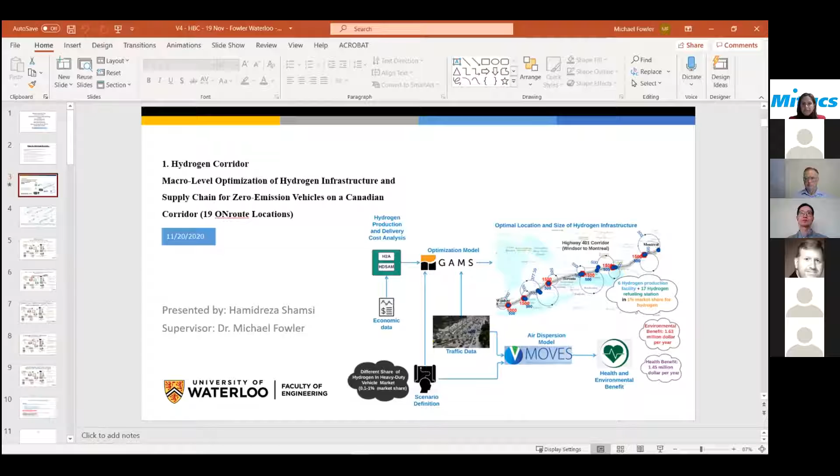So if I look at the scenarios, hopefully you can see 5 scenarios now. Yes, we do. Okay.

So the scenarios start at 0.1% of the total number of vehicles, going up to, let's say, just 1% of the Class 8 vehicles. I'll just say class vehicles, although I'm including Class 7, 8, 9, and 10 vehicles, which are all slightly bigger or smaller vehicles. But Class 8 is the most common one that we have.

If we look at up to about 1% share, we've looked at those scenarios. We've said that about 1% of the hydrogen, or about 200 Class 8 vehicles of the total 20,000 truck trips that I'm referring to—so I'm not really counting the number of trucks, I'm counting the number of trips.

I say you have about 500 kilometers per day. So I can envision maybe 200 vehicle trips needing hydrogen along the corridor. That's where I see the first change we can have.

The first thing we can say is if you look at scenario number 5 here, 1%, then we will need 6 en route locations, and the other locations can be served by moving trucks with hydrogen to them, to refuel at all the other en route stations. So that's what's working around for us.

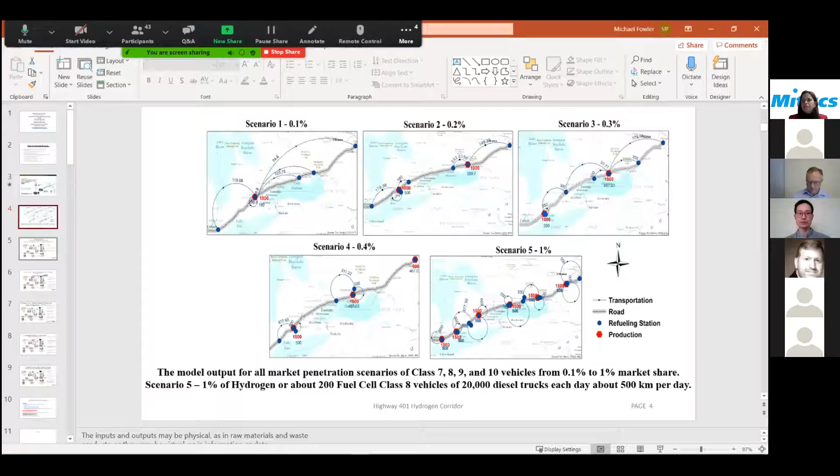So what I'm really looking at is the idea of what I call the hydrogen economy, one of the power-to-gas energy concepts that you'd have. All the common pathways to power-to-gas involve hydrogen—you go into the grid and into the electrolyzer.

This is the first thing we can look at, and it's the more global issue we have in Ontario. We have a problem with the curtailment of electricity, coming from both nuclear and from wind. There's a lot of electricity that is curtailed at this time, and that is the challenge we have. We have all this electricity, and it's causing something.

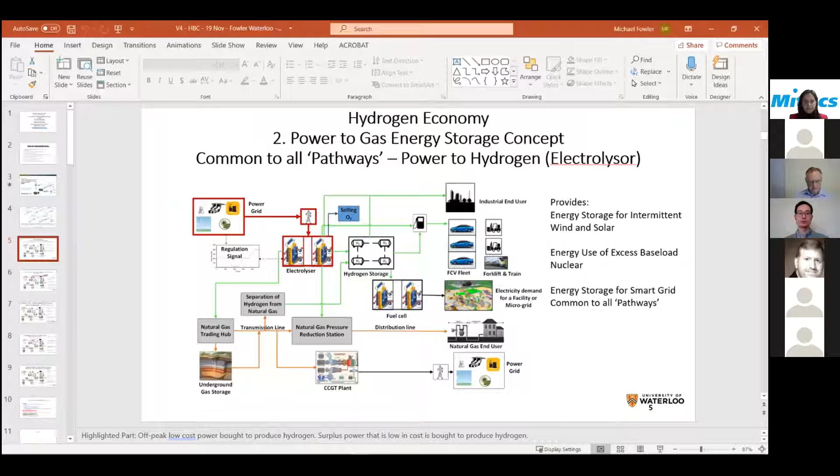If you look at your electricity bill and see something called global adjustment—we're generating the electricity, but then we're dumping it into the water, or turning off the wind out there. So the first thing we want to do is try to suck up all of that energy. We may as well, since we're paying for that energy anyway, so it makes sense to start making hydrogen energy since we're paying for it.

So the next thing we say should be number three—looking at power-to-gas, the renewable option to what I call the petroleum option.

One thing we can have is lots of cars on the road, and we're going to have those cars for the next 10 years for sure. We're going to have lots of cars and trucks, and we have refineries that make diesel and gasoline. Those refineries need hydrogen, and we can convert them.

Right now we're making hydrogen with natural gas, but we can also put electrolyzers into industrial vehicles. If you were to install about 100 electrolyzers and hook up all the extra electricity we'd have, that would be the equivalent of 30,000 vehicles without changing the type of vehicles, because your gasoline would be getting cleaner at the refinery.

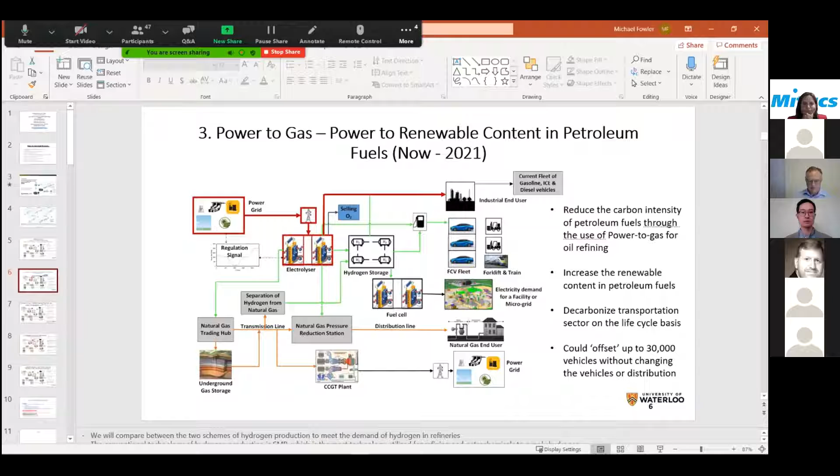It would be getting cleaner on the diesel side too. So we'd effectively have 30,000 vehicles improved, because the refinery itself would be made cleaner. So we're looking at something like that - what I'm calling power to gas.

If you look at this power to gas diagram, you see the red line coming around here. Very recently we had a regulation where Enbridge got approval that they can put up to 2% hydrogen into their natural gas. If you make hydrogen and put it into the pipeline, you'd have cleaner natural gas for all the end users - homes, industrial places - all getting that hydrogen blend in their natural gas.

Now you'll see I put up a title that says 2% regulation, and when it is 2050, I don't envision us achieving zero emissions by 2050. Yes, it would be a nice target to get there, but I doubt we'll make it. Natural gas is really good, clean, low cost gas, and we're still using it.

We're building a new pipeline. We're having liquid natural gas, moving that around the world. Everybody's using natural gas around the world. So yes, everybody would like to go to zero emissions, but I can envision us probably using natural gas for a long while yet.

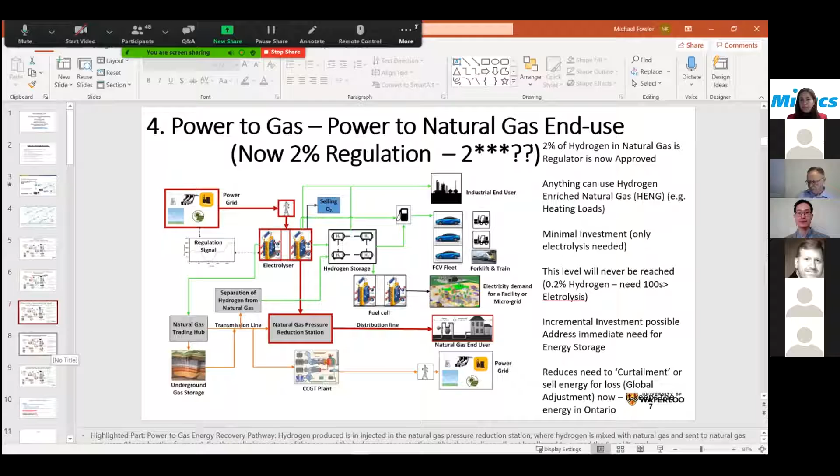So what we really want to do is start using up the curtailment and stop losing that energy and cost. The next idea we had was moving into microgrids - yes, you can have microgrids that refuel at locations, like for people using forklifts. They could eventually get into trains.

It would be really nice to use the Pearson line as an ideal starting point for a train using hydrogen along that line. We could use that as a starting point. We could also use these microgrids elsewhere.

We've already seen examples done - Walmart tried one in Calgary. They've also done some modeling of other locations where people have installed these. Canadian Tire has distribution centers where these economies can be installed.

They could be installed with a small amount of electricity or a large amount, depending on the economics, because companies should be paying for their own microgrids - they can get started on those right away.

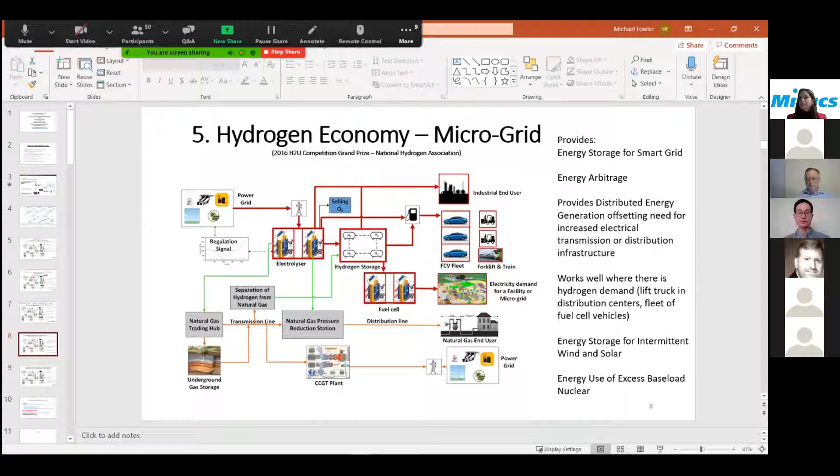The next idea we have for the microgrid is moving that power to power. We can use energy arbitrage and shift charging at locations where they have storage of hydrogen generation, putting it into their tanks, and they could go back toward those uses.

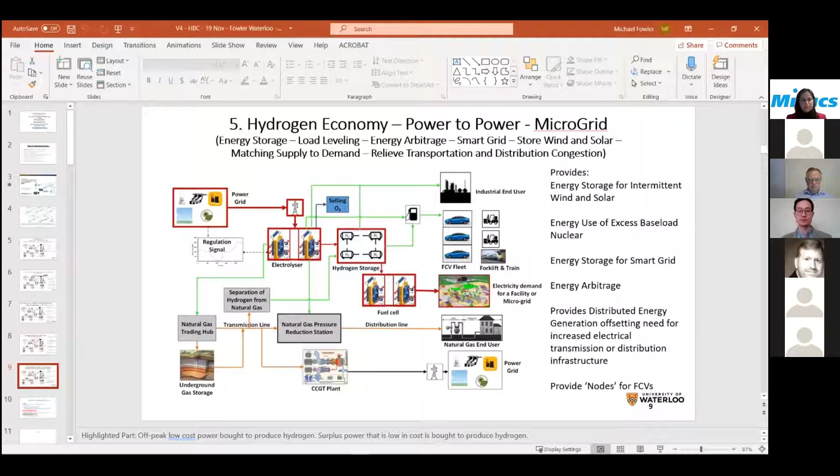So my time is coming up right now. You should be seeing the ideas for the hydrogen economy - it says 2020 now, but I actually had these ideas for the hydrogen economy about 6 years ago. Right now we could get hydrogen refueling on the hydrogen corridor at en route locations right away.

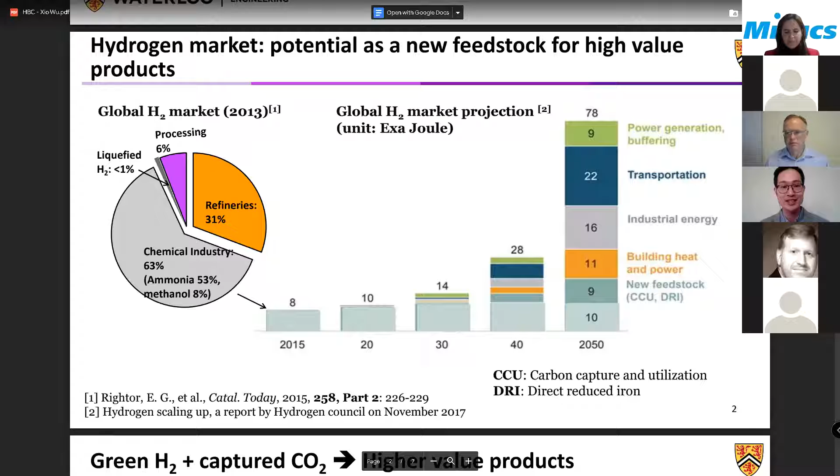You can see that hydrogen will not only have great presence in transportation and power sectors, it may also offer new opportunities as feedstock for carbon capture and utilization, which is abbreviated CCU. Next slide, we'll see why it's important to develop these ideas to convert hydrogen and CO2 into higher value products.

Here you can see an ecosystem which consists of renewable electricity, hydrogen applications, and carbon capture. These 3 areas are all interconnected and will grow with each other. It will also allow us to make the best out of the new infrastructures we are investing in, such as wind farms, solar PV for renewable electricity, electrolyzers, hydrogen storage for the hydrogen economy, and also CO2 capture facilities and CO2 storage for carbon capture, to have net zero emissions in 2050.

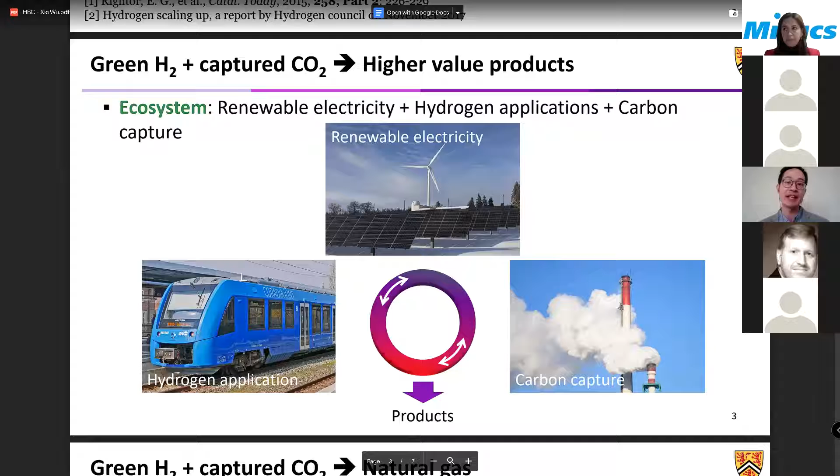Now I will show you 3 examples we are investigating at Waterloo on these topics. The first example is shown on the next slide. It is about converting green hydrogen and captured CO2 into natural gas.

This is also called power to gas, which you learned about in Professor Fowler's talk. It can be an energy storage solution for off-peak renewable electricity, and it can also be a carbon reduction technology that recycles CO2 from natural gas combustion. Power to gas is actually not a new technology - you might have read that Germany and other European countries have already constructed several plants for power to gas.

However, its efficiency is still low, and this low efficiency is one of the drawbacks when people compare hydrogen with battery technology. So here we were developing a new idea that can combine electrolysis and methanation into one reactor, which you can see here as route 3. In the conventional reactor, shown here as route 1 on the left, the electrolyzer and methane conversion are separated into 2 reactors.

However, if we can combine them into one unit, you can make use of the thermal and chemical integration and improve the process efficiency. We did some analysis, shown on the right. The blue and red lines with diamond symbols show the efficiency of this new route, which is higher than the broken lines for the separated case. So combining these two reactors into one unit, we not only increase efficiency, but we can decrease the footprint or the space required to house this reactor.

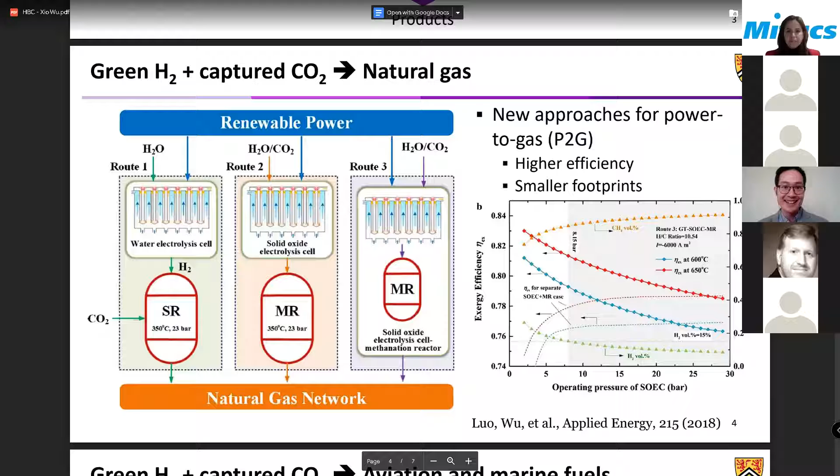The next slide shows the second example, converting green hydrogen and captured CO2 into drop-in aviation and marine fuels. You can see from the schematic there are three different subsystems. We have water electrolysis that produces hydrogen, and then the hydrogen reduces the CO2 into CO for downstream chemical reactors.

Actually, some researchers develop new processes that can directly use CO2 as a feedstock, meaning the reducer might not be required later. And we also have, on the right, the catalytic reactor to produce long-chain alkanes or methanols for the fuels.

So these different reactors work at different scales. Chemical processes, the catalytic reactions, usually favor large-scale production, but the electrolyzers and the reducers can be modularized, which have a smaller space and smaller footprint. And they also run at different times.

We learned that electrolyzers usually use off-peak electricity to be more economic, so it can be on-off operation. However, the chemical reactors favor working 24/7 because we want to maximize production. In order to integrate these different processes of different scales in space and time, more R&D is needed to improve the flexibility of the process as well as the efficiency, so the goal is to decrease the cost.

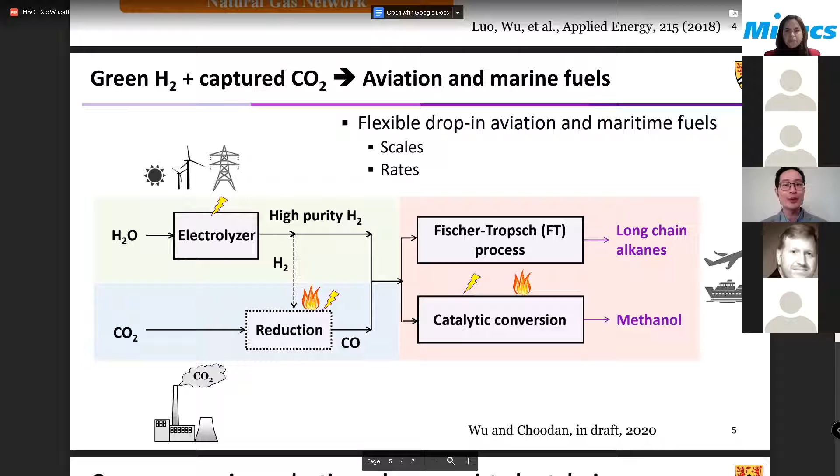The third example is on the next slide, where we show green ammonia production. Here we don't have CO2 as a feedstock, but we would decrease CO2 emission in the fertilizer production process. In our group, we utilize plasma-assisted catalysis so that we can convert ammonia from air and water directly from electricity. This will also favor small-scale production.

On the right figure, you can see the levelized cost of ammonia production using different approaches. The Haber-Bosch process, HBP, shown here, is the conventional large-scale ammonia production, and the cost is around $500 to $600 per ton of ammonia produced.

However, if you want to scale it down for distributed production, the cost increases sharply because it's difficult to scale down the reactor as well as the air separation unit required to separate nitrogen and oxygen. However, when we have this type of plasma electrochemical cell, PEC on the plot, the cost for this small-scale production is much lower than HBP.

And also, if the electricity price drops, this electrochemical process will be more competitive. In this case, more R&D is needed to understand the mechanism for plasma catalysis, how we can incorporate plasma and catalytic reactions into one reactor so we can control it better and decrease the final energy consumption.

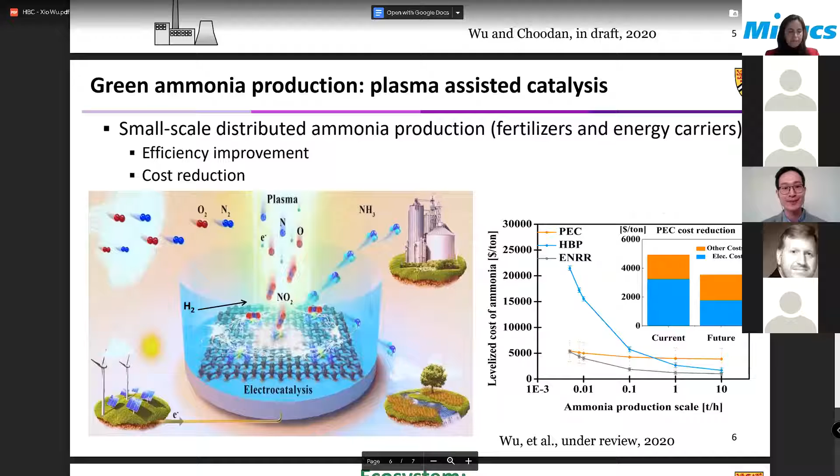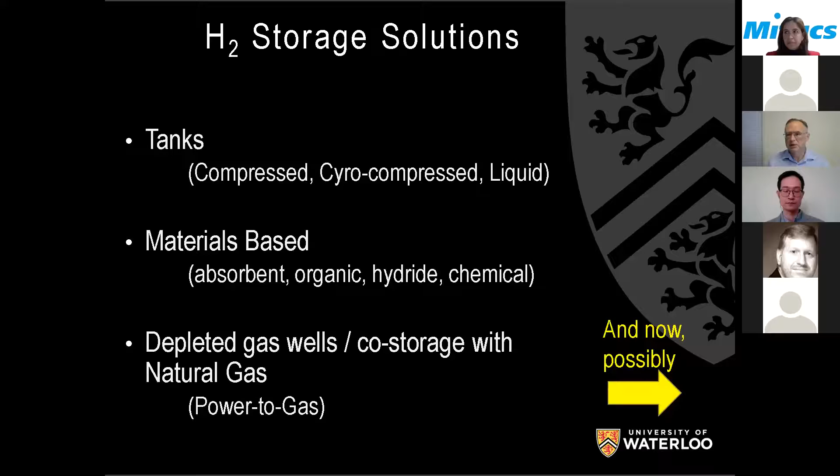Next slide. Now possibly I'm going to discuss some research that I'm currently involved in, very quickly. I work in the area of energy systems. One of those energy systems is compressed air energy storage. And this is an example of one of our ideas for involving hydrogen and compressed air energy storage.

Now this is a classic diabatic compressed air energy storage. We have the compressed air on the left going into turbines. You have to provide heat. That heat is provided by combustion, typically natural gas, but it could be hydrogen. That hydrogen could be stored in caverns or depleted wells. It goes along with these compressed air energy systems, and that hydrogen could be part of power to gas and combined with methane, providing the thermal energy necessary for these systems to run.

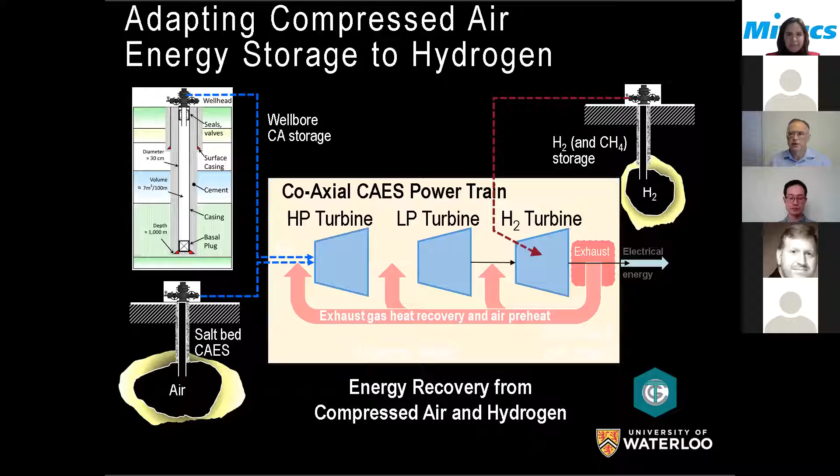These systems can be very large scale. We're talking about providing gigawatts of energy for a couple hours a day - it would not be unreasonable for a compressed air energy storage system combined with hydrogen. Very large. This would be your utility scale system. This is not exactly what I want to focus on hydrogen-wise, because I think some of the ideas that Professor Fowler brought up about a hydrogen highway - you're going to get things integrated not at big scale initially, it's by small stepping stones.

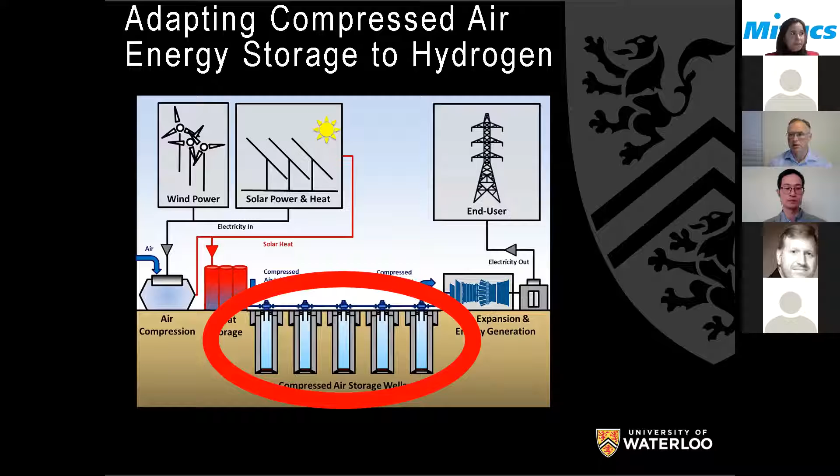So another idea that we're investigating is compressed air energy storage in wells. And these wells - I'm just emphasizing the part here of this particular diagram is where we've placed this large cavern, usually a salt cavern, with wells. We actually mechanically drill these wells up to maybe 500 meters, up to maybe 1.5 kilometers, up to maybe 30 centimeters in diameter.

So a rough calculation for one of these well bores at 1.5 kilometers depth and 6,000 PSI - we can go up to 7,250 PSI easily in well bores. They're extremely safe in the sense that, unlike surface tanks, if they explode, it's vertically, so they have a very known explosion direction, and they have the reinforcement of the ground for the rest of their holding of the pressure. So estimates are that one of these deep well bores with this pressure could probably run, based on our fuel cell cars that we've looked at, about 400 to 500 fuel cell cars, about 600 kilometers each, for one of these bores. And of course, you could have multiple bores.

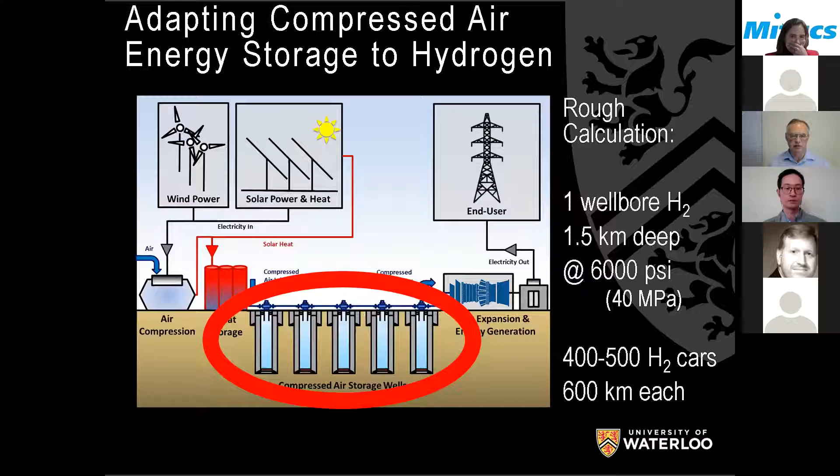Next slide, please. So I summarize things here on this slide. There's a lot of information. Given time, I'm not going to step through it all. I will just point out a couple of things. Storage temperature can go up to 200 degrees. We're talking 50 megapascals and up to 1.5 kilometers depth, probably a minimum of 500 meters depth for one of these systems. What I would like to highlight and for you to pay attention to with all this information is the items in orange.

You can store up to 10 plus megawatt hours with the wells. They have a long life - wells are known to have a long life, it's just inherent in the experience that we have with them. They're independent - this is key - independent of geological and geographical conditions. So if you do want to have a distributed hydrogen system along the 401 for, say, a hydrogen highway, this is an ideal solution for storage, we believe, but it still requires research. And it's scalable - you can drill 1 borehole, 2, 3, 4, as many as you need for the size of storage you need in the location you're looking at. And it has a small surface area impact and a large underground footprint, because it's mainly underground.

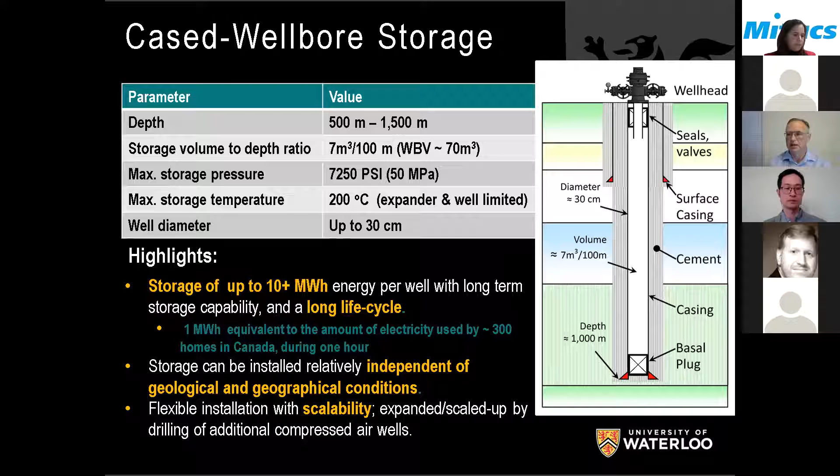So that was a discussion of storage. I know I went very fast there, but I just wanted to plant the idea. The second thing I'm talking about is the other area of personal and global reasons to invest in hydrogen. That has to do with health, as measured by premature death.

This is some work by Rebecca Saari, one of my colleagues in Southern Ontario, looking at the emissions from fleet trucks - freight trucks running on the 401, not all trucks. So it's a very limited number, and only looking at the 2.5 micron particles.

When you have particle emissions from diesel, over 90% are less than 1 micron in size. For your information, the big problem here is the particles of this size, 2.5 microns and smaller - once you inhale them, they never leave your lungs. They're stuck in there forever. They also form catalytic sites for some reactions that may be damaging to your lungs.

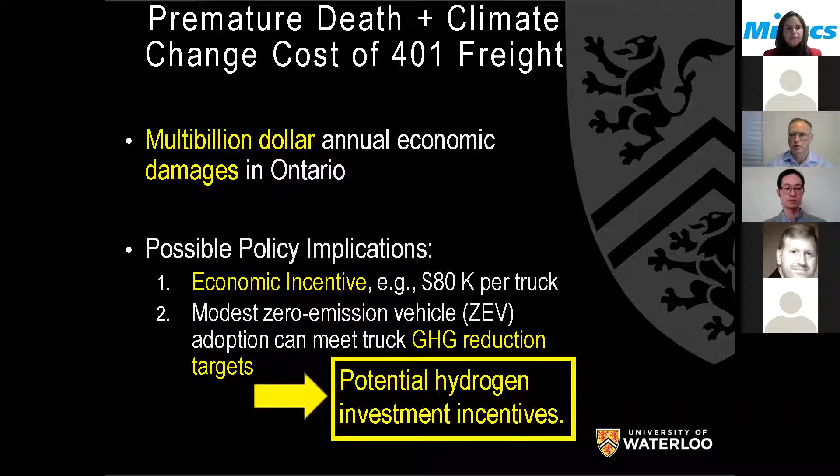So there's potential hydrogen investment incentives here if there's a political will for it. By the way, there's more emissions of concern from cars. We know about NOx and smog production. There's unburned hydrocarbons, carbon dioxide - of course a greenhouse gas - and CO, which although it's short term, can be a problem for those with strained respiratory systems.

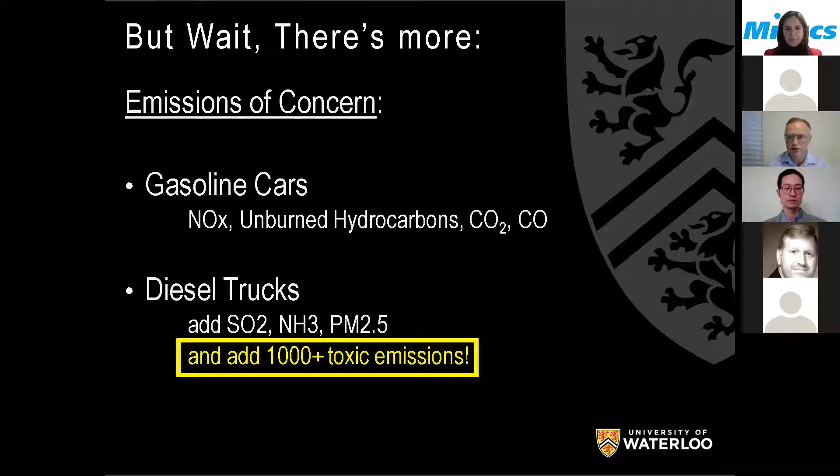Diesel trucks add some significant other items: SO2, NH3, and particulate matter. And then there's also about 1,000 more toxics - that's my area of current research in emissions, those extra toxics.

Here's an example of some research we've done looking at benzene. This is in St. Paul, Minnesota. Why do we do St. Paul? It's one of the few places in North America with sufficient monitoring sites to actually match models to data. You see here a distribution of benzene through the population, in the vicinity of a highway.

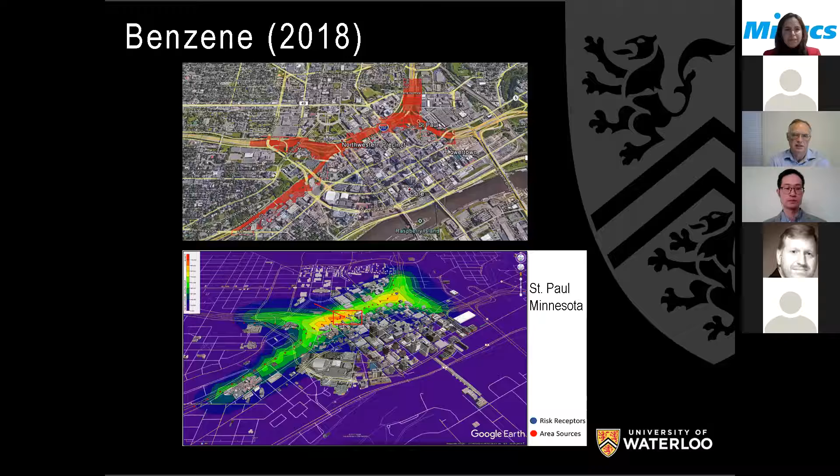Where you live does have an impact. Time of day has an impact, and that's one of the things we're now investigating. A lot of these studies are integrated over multiple days - we're now looking at hourly type impacts. Even just the time of day you travel to work could have a major impact on the health impacts you experience driving on these highways.

And yet there are pathways that haven't been considered - these are areas of future research we're working on. In particular, particle deposition, vapor transfer, and root uptake. There's been some research on deposition on agriculture crops, but root uptake and vapor transfer is not well studied, and wildlife and the environment is basically ignored in terms of impact. So again, additional impacts that have yet to be considered in the costs I was describing earlier.

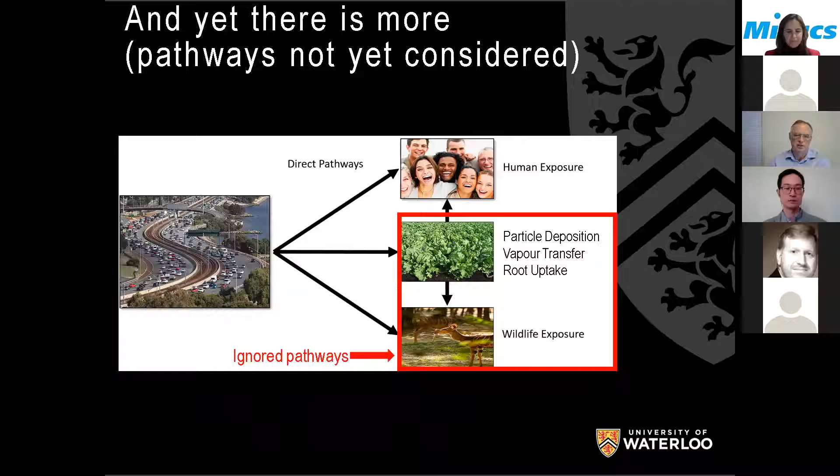And there's all these toxics in there. These are good reasons, once people are aware, for moving away from our diesel trucks on the highway towards a hydrogen economy. The next slide is simply the questions. So I will end my talk there and let us move on to the next presenter.

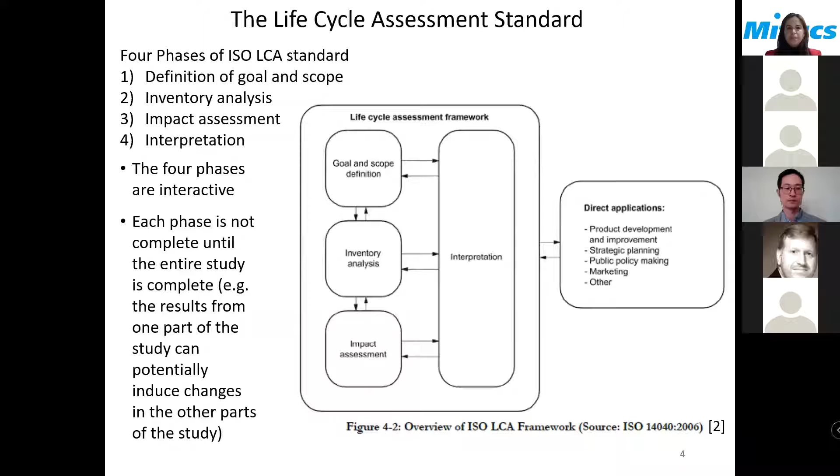On this slide, I'll briefly go over the life cycle assessment process. The ISO standard 14040 provides the general framework for conducting an LCA study, and as stated in that standard, carrying out an LCA involves 4 steps. The first step is the definition of goal and scope. For the LCA studies we surveyed for this presentation, the general goal was to determine the environmental impacts of hydrogen production. The other stages are inventory analysis, impact assessment, and interpretation. I'll go over these stages in more detail on the upcoming slides.

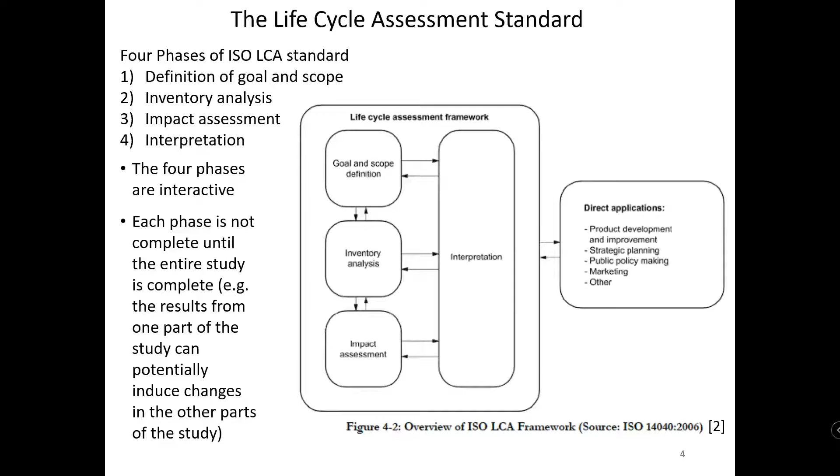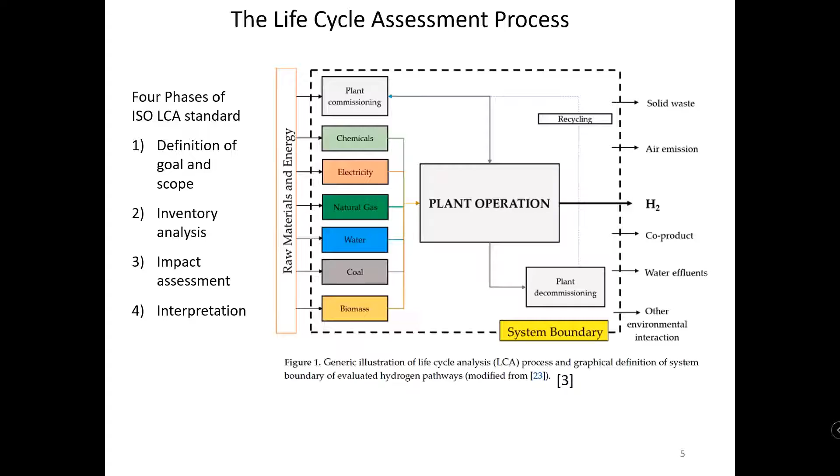For example, if one was carrying out an LCA for hydrogen production from electrolysis, the emissions caused from manufacturing and disposing the electrolyzer are typically omitted, because almost all emissions come from the hydrogen production process over the 20 or 30 odd year lifespan of the electrolyzer. Another thing to set when defining the scope is the functional unit. For the LCAs reviewed in this presentation, the functional unit has been set to 1 kilogram of hydrogen produced.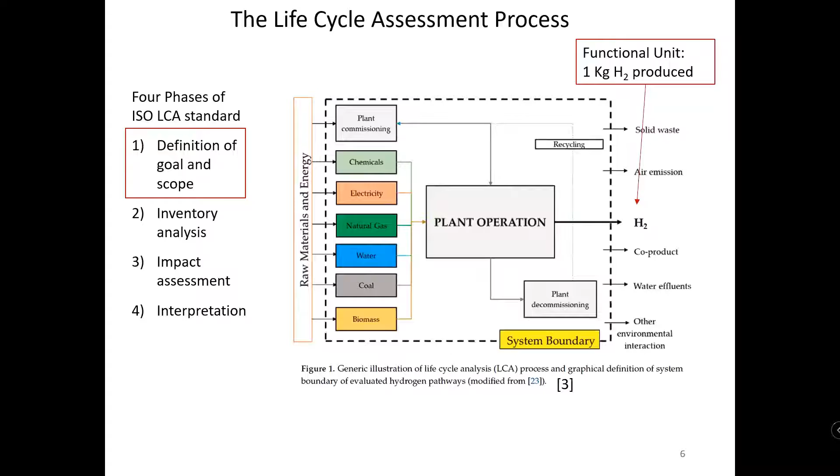In the impact assessment phase, the results from the inventory analysis are used to quantify the environmental impacts. There are many different environmental impacts that can be considered, including global warming potential, acidification potential, and resource consumption such as water consumption. However, due to time constraints, in this presentation we're only going to consider how the global warming potential is calculated, and we're also going to skip over the interpretation phase due to time constraints.

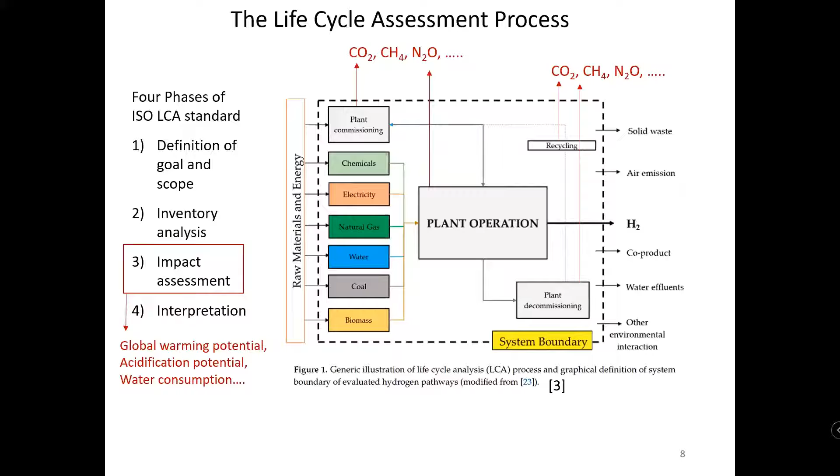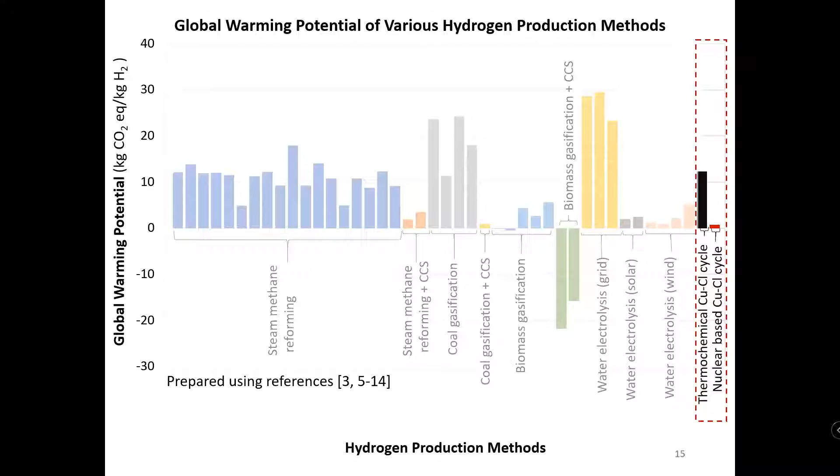In conclusion, a variety of different hydrogen production methods have been reviewed. The best hydrogen production method for a given application will depend on the hydrogen sources available and the purity and amount of hydrogen that is required. Life cycle assessment can be conducted to estimate the global warming potential of the various hydrogen production methods. And finally, life cycle assessment can help to plan for an appropriate mix of hydrogen production methods that can push forth the hydrogen economy while complying with Canada's long-term low greenhouse gas development strategy.

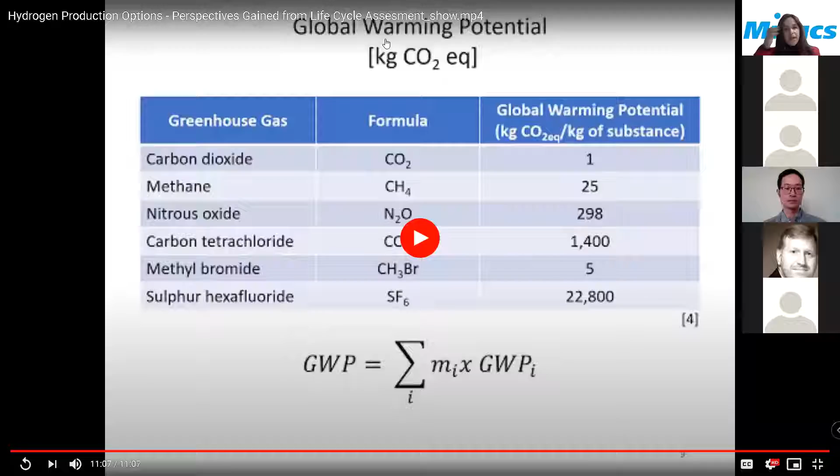So I have one question for Dr. Fowler first. Dr. Fowler, with the announcement by the Minister of Environment at this conference yesterday, and based on your models and experience, what would be the top action that the province should prioritize in this strategy in order to move the sector forward?

3 electrolyzers along the ONroute stations, because then you would be able to have Class 8 vehicles moving along the 401.

And if you put 3 electrolyzers there, I don't know how much they'll cost right now, but probably a couple million dollars, around $2 million, maybe a little bit more for each location.

But there would give us 3 locations around the ONroute, would start allowing us to have Class 8 vehicles moving onto the 401. And keep in mind, all the manufacturing that comes from Ontario moves right around that 401, and it moves into the manufacturing, and that's where all the parts go for all the automotive, and all the parts move along the 401.

So I would say start with 3 electrolyzers, which is not a huge amount of money for Ontario, but it's achievable.